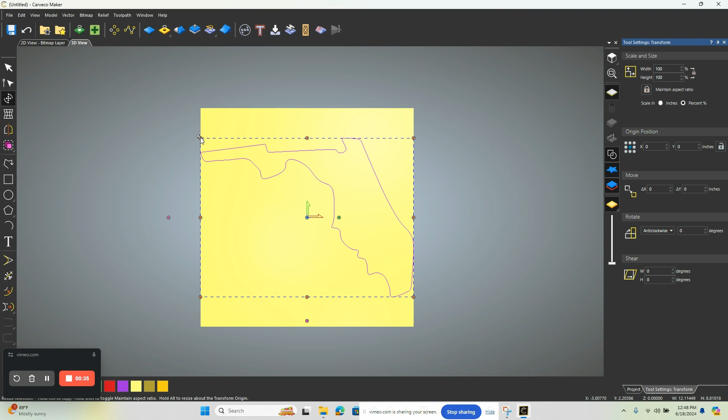Alright, so it kind of scaled it to our stock. We're going to bring it in a little bit smaller. We want to zero it, so we're going to come over to here and say 0 tab, 0 tab, and then apply. So that puts it on 0.

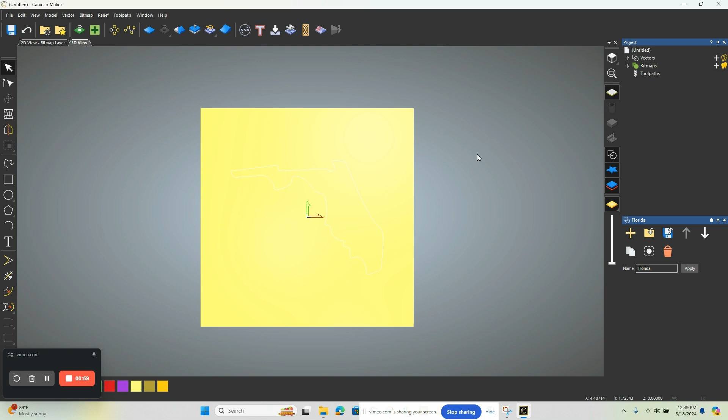Now this one, when the model is showing, it's kind of hard to see, so we can click this one here and that will hide that screen. Okay, we can zoom in and out with our mouse wheel.

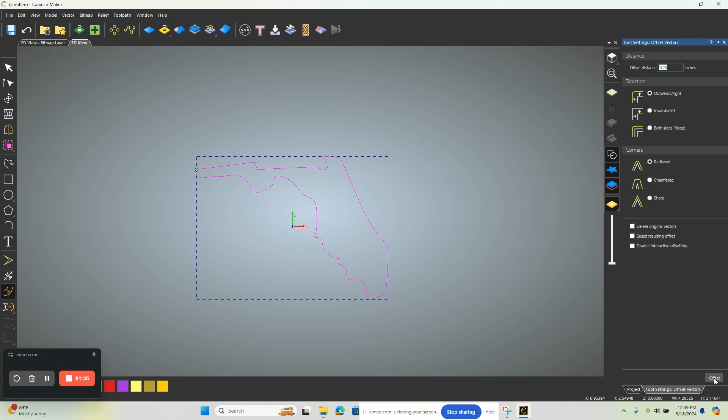Alright, what we need to do is offset this, so we're going to select this and we'll go to Vector and we're going to say Offset. From here we're going to say the size of the offset, that it's outward, and we'll go ahead and say Offset. And from there we can close this one out.

Okay, so now we have this profile and we have this profile. So what we're going to do is select this one and we're going to go to here where it says Create Inlay. From there we're going to choose a pocket.

From there we're going to go ahead and set our finished depth. So this is going to be 1/4 inch. We're going to go ahead and pick the tool that we're using. So we're going to go to a roughing tool. It's going to be this one. And we'll choose Select. From there it's a raster cut.

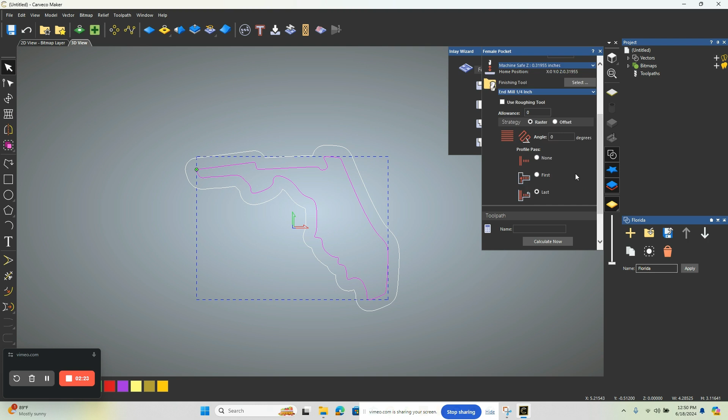And we want to set up the thickness of our material. This is going to be a 1/2 inch. We'll choose OK. Choose Calculate.

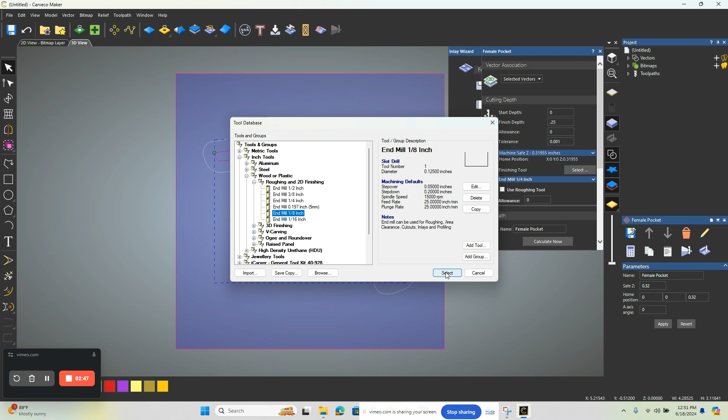This is saying the tool is too large, so let's go ahead and adjust our tool. So I'm going to do Select. We're going to go to an 1/8 inch. Yeah, that should be fine. Let's see what it does. Calculate. Alright, it's able to go through and clear all that. That looks good. We'll cancel this out.

We'll cancel that out. Alright, now our next step is to select the outside shape. This time we're going to go to Profile. This is going to be an outside profile. It's going to go all the way through.

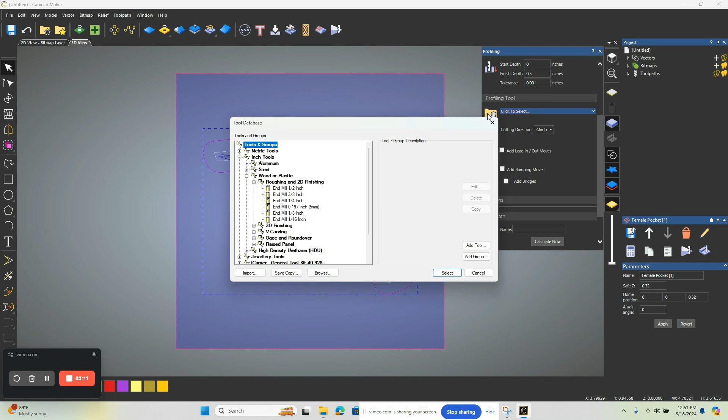We're going to pick our same tool, which is here. We'll say Select. We're going to do Calculate. Alright, so now we ran the outside and the inside.

If we notice, we can see we're getting multiple steps to get down to the bottom, so we want to adjust that. So we're going to go over to our toolpaths. We're going to go to the female pocket. We're going to double click on it. Alright, so a lot of times the settings, like the other versions, they go with the tool.

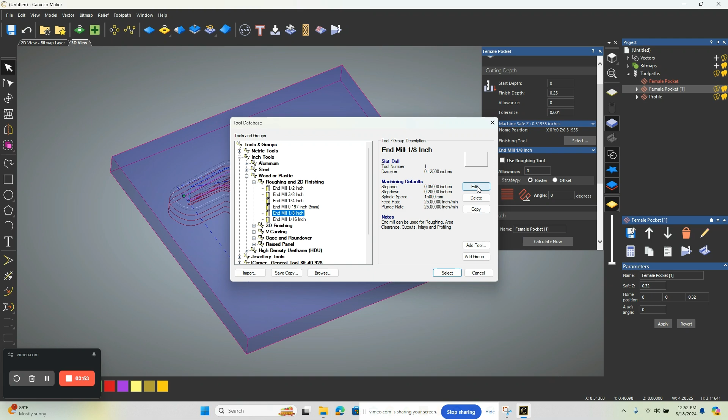So if we grab our tool, it's got what our step down is. So we're going to change that step down amount to 0.25. We'll set our feed rate to 50 and 50. We'll choose OK. We'll say Select and Calculate. And now we can see we just have our single pass down here at the bottom.

Alright, let's go ahead and close that. We're going to go to this next one. We're going to double click on it. We're going to go to our tool.

Okay, so this is another navigation here, so we can hit this arrow down. And then this has our step down, so this is going to be 0.5. This is 50 and 50. So we'll do Calculate, and then now that's doing that in one pass.

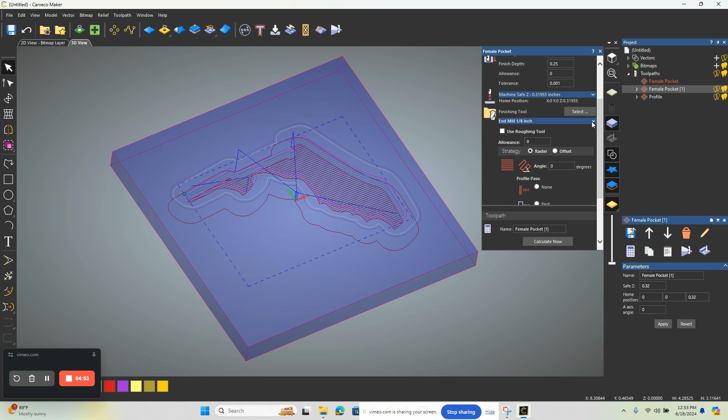We come back to this one. Let's see if we have that same workflow here. We do. So we can hit this arrow down in order to get to our settings to adjust our step over or our step down.

Alright, now that we've generated our toolpath, our next thing we want to do is run a simulation. So we're going to select all of these. So we're going to say this one and this one. Actually, this first one we're going to delete, so we're going to highlight it and hit delete and say OK.

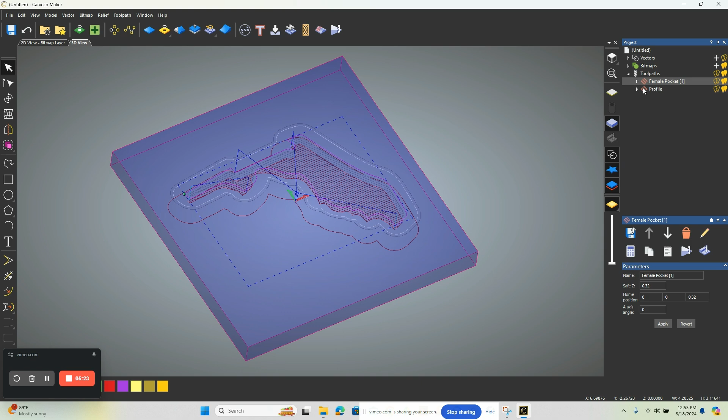This one, we're going to highlight this, shift, highlight that. We're going to go to simulate. That shows us our simulation, so we can see we get our pocket and our profile cutout.

Alright, okay, so now that we've done that, what we want to do is save or post our G-code. So we're going to go here, we're going to say save toolpaths as, and then this interface is for when you have multiple tools. You can pick which ones you're going to post. Down here you can pick the file name, so you can give it a file name.

This one here, these are all the different machines that you can post to. They have quite a lot of them, right? And then the last thing we would do is choose save. Okay, that's going to save our program. Alright, so now that our program is saved, we'd be able to open that up in our control software.